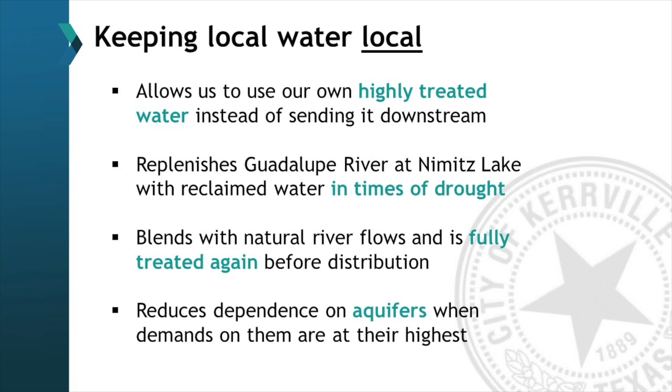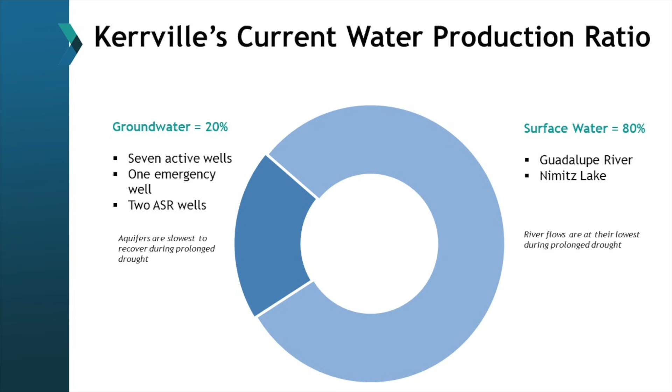So as you look at our current water production, typically we're about 20% groundwater and 80% surface water. Our surface water is a river and lake, and our groundwater, of course, are active wells, an emergency well, and 2 ASR wells. But keep in mind, these two are what suffer during extreme times of drought, or even during drought. These are the ones that suffer.

So many questions have been asked, right? What happens to your wastewater now? We treat 2+ million gallons per day, between 2 and 2.5. We are permitted to treat 4.5. So right now it's a little over 2. Some of that water goes into the Guadalupe River right now. It flows downstream towards Canyon Lake.

The other treated water is supplied for irrigation. We do have about 7 customers that utilize our reclaimed water. You'll notice around town satellite ponds that belong to those customers, and that's what's used in their distribution for irrigation.

Because of Kerrville's proximity to the headwaters, we operate under one of the strictest wastewater permits in Texas. That's not going to change. I want to mention that in order to operate a wastewater permit that is one of the strictest in the state of Texas, it takes competent operators to work at this facility to make sure we're in compliance. So we do have that in place right now. We have very dedicated employees, some of them are here, on both the water treatment plant as well as the wastewater plant.

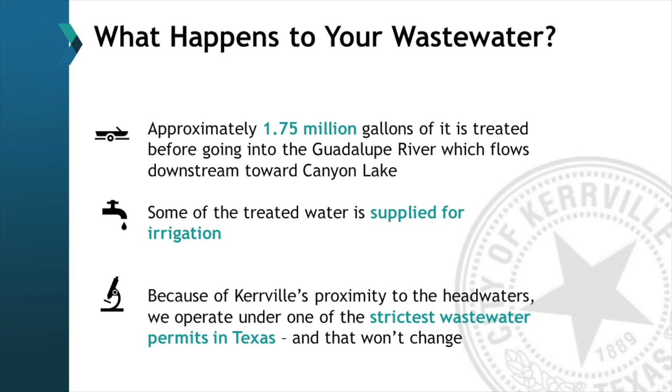What we're proposing is to back that up. Some goes to Flat Rock Lake, and the rest goes to our Kerrville Sports Complex, one of seven locations. The proposed route is to extend the pipeline from the Kerrville Sports Complex about 1.6 miles toward Elm Creek Park. That's what the project consists of. The discharge point we're proposing as our starting point is off of Aspen, and that's what we're going to look at doing.

Project considerations: we do have some permits we still have to go after. We're going to look at our bed and banks permit, which allows us to secure the water we're discharging. It doesn't get accounted toward our water permit that we're utilizing at that time. We're hoping to keep this water isolated to belong to Kerrville.

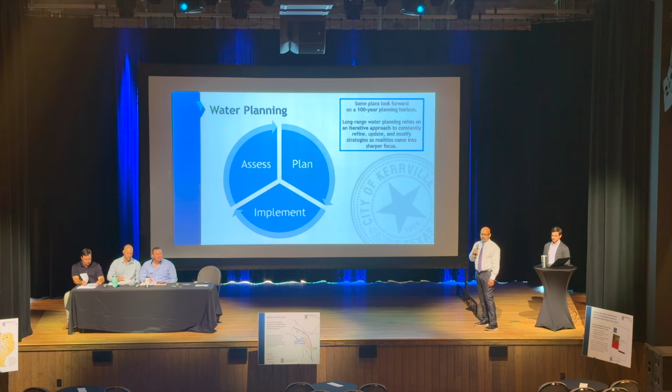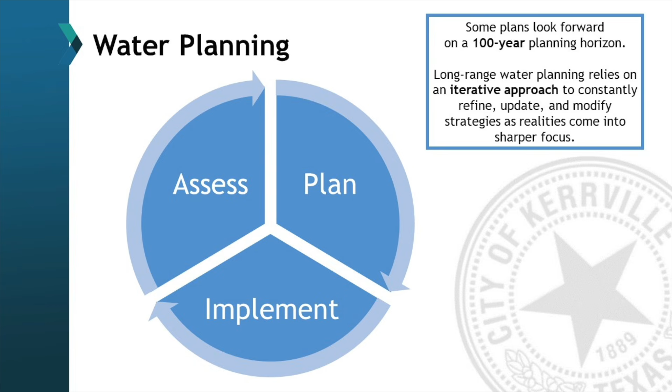We'll move on to water planning. It's like a cycle: everything you plan for water, you plan, implement, assess, and come back again to keep planning. That's the model we have here. Some plans look forward on a 100-year planning horizon, but that doesn't mean it won't change. Things change. Long-range water planning relies on an iterative approach, constantly refining, updating, and modifying strategies, some realistic, some dependent on new technology or new developments that come our way, which may change our planning. But you've got to start somewhere.

Moving on to some of what we've done: in 2008 we created water and wastewater master plans, which have been updated several times. We've also implemented recommendations, including the new Ellenberger well, pictured here on the right. Back in the day, we had those masks.

Yeah, this well was broken in. We broke ground in 2020.

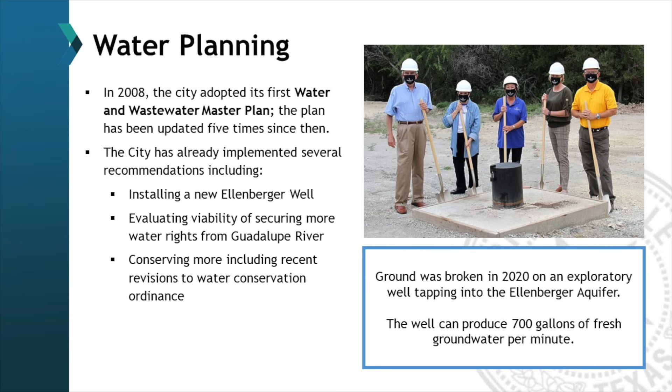We've also evaluated the viability of securing more water rights from the Guadalupe River. That's not easy to do. There aren't many rights available, and you have to deal with senior rights, junior rights. There's a lot involved with obtaining water rights. But the key thing is evaluating what rights are out there. They may not be available, but you still have to know what's out there and see if there's anything we can obtain.

Key thing here in any water conservation strategy is including revisions to our water conservation ordinance. We've tightened it up a little bit and adjusted some of the stages we have in place. We visited with our development services team to see how we can address any new development coming in, and make sure we have low impact to our water through various methods being considered. Just as an example, landscaping alone, irrigation systems, all those types of things. We want to continue to look at that, as well as enforcing the existing ordinances we have in place.

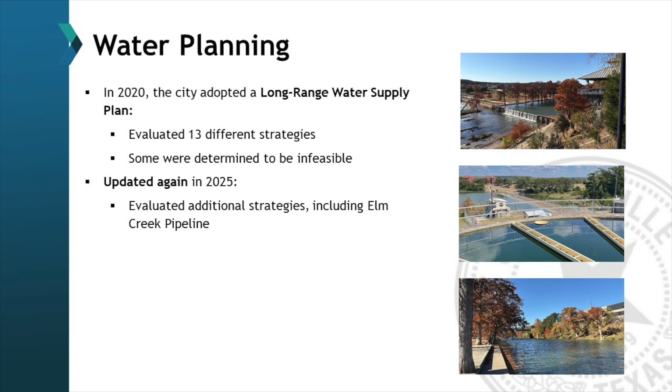Moving on, in 2020 we'll discuss the long-range water supply plan that was adopted that year. We evaluated several strategies in this plan. Some were determined to be infeasible or too costly. So we did some updates again in 2025, and that's where we came about the project on the Elm Creek Pipeline. That's where we're at today, after the reevaluation.

Here are some of the other strategies we looked at. I wanted folks to realize that the Elm Creek Pipeline isn't the only project we looked at. We've been looking at different strategies, different projects, what we can bring on board and what we can't. So in this quick snapshot, you look at that remote well field, the price tag is about $69.5 million. That would require us to acquire or lease, I believe, over 4,500 contiguous acres. That's hard to find here in our area.

The other option was DPR, direct potable reuse, with a price tag of about $16.2 million, followed by the other pipeline route we were looking at, the South Bank, at $7.6 million, and then the Elm Creek option at about $3.1 million. One key thing to note is if you look at the estimated water production column, they all yield about the same—the bottom three around 560 acre feet. An acre foot is about 325,000 gallons. So they all yield the same thing, but the important thing is the price per acre foot per year—a big difference. That's how we landed on this pipeline project.

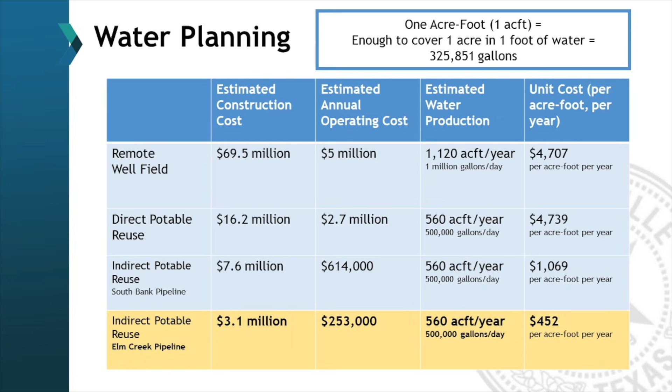So why are we here tonight? I will now turn it back over to Martin.

Thank you, David. There was obviously a lot of thought, science, and planning that went into getting us here tonight. But what's incredibly important is that while engineers are thinking about the science and technology, absolutely central to the conversation is: what are the community's priorities? As I mentioned, we were here a year ago—I see some familiar faces—talking about the community's priorities for a sustainable water future moving forward. So in addition to hearing your questions about this particular project, we also want to take a moment to see whether the priorities we heard a year ago still hold up. Are those still the top priorities today?

If we take a look at the next slide, I'll remind you, if you participated last year about this time, we did a six-question survey and got hundreds of responses. One of the very first things we asked was: what do you think should be the City of Kerrville's number one priority? We made you pick one—like, if you had to ratchet one of these to the top, which would it be? Keeping water rates affordable, being a good steward of ratepayer dollars, delivering clear, great-tasting tap water, ensuring an adequate supply, addressing operational challenges utilities across the country face including aging infrastructure, managing to meet the needs of a growing community, and protecting natural resources.

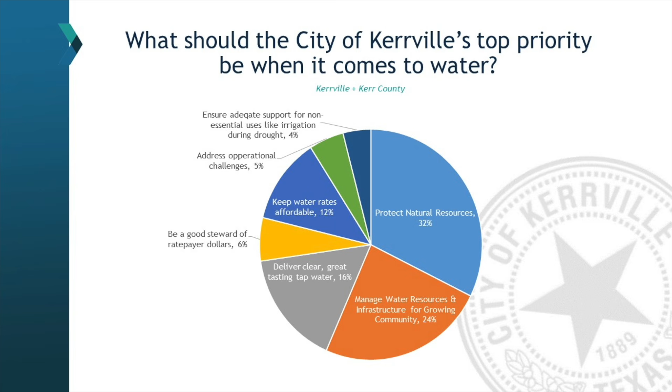Far and away, protecting natural resources emerged as the number one priority. If people said, if you have to pick one thing, make sure you're protecting natural resources. Second to that, manage those water resources, manage infrastructure, invest in infrastructure to serve our growing community. And all those other things, delivering great tasting tap water, being good stewards of ratepayers' dollars, were all important, but they did not perform nearly as well as that idea of protecting the natural resources, the things we rely upon that make the hill country, and managing water resources for the growing community.

So what we're going to do on the next slide, if I can encourage you to get out your smartphone, we are going to do a quick interactive exercise. I think that QR code is probably big enough. Let me know if you have trouble getting it. If you do, you can enter that really long, really complicated URL into your web browser. Is anybody having trouble with the QR code? I'll give you guys a couple more minutes to go ahead and get logged into the site.

And you should see a question that looks a lot like that question we asked in the 6-question survey last year. What I'll also share with you is when we put together invites and materials, and we're working with the city on some information for the website, we asked these same questions. What is your number one priority? And we're going to see if they all line up. I'm going to switch over to a live tool that we use that will display the results in real time.

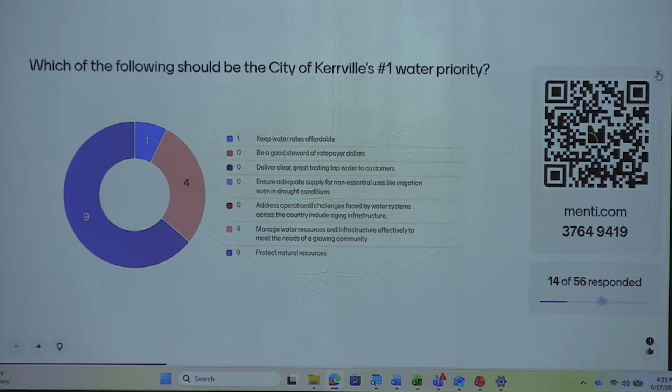All right. So if anybody else was having issues, there we go. All right, you should see numbers begin to tick up in real time. So I know more than 14 people are going to respond. I'm going to give it a minute, we'll let those answers come in. 14, 18, 20, ticking up slowly. Going to give it a couple more minutes for folks to get in.

But I will tell you, the thing that we're seeing here is the thing that we saw last year, is the thing that we saw when we sent out or placed a survey on the city's website. Protecting natural resources really is, at least among those of us in this room, a key priority for what should be the city's number one water priority moving forward. And interestingly, second to that is the idea of managing water resources and infrastructure to meet the needs of a community that is growing. So very fascinating to see that over the last year, there does seem to be some continuation of the belief that protecting those natural resources remains the number one priority.

All right, I'm going to go ahead and move on to the next question. And this is one with certainly no right or wrong answer, and it's a very easy one. When you heard about the Elm Creek pipeline, before David and before you talked to his team, told you all about the science and the engineering and all of those pieces, what was your initial reaction? Was it a thumbs up, big thumbs up, or a big thumbs down, or somewhere in the middle?